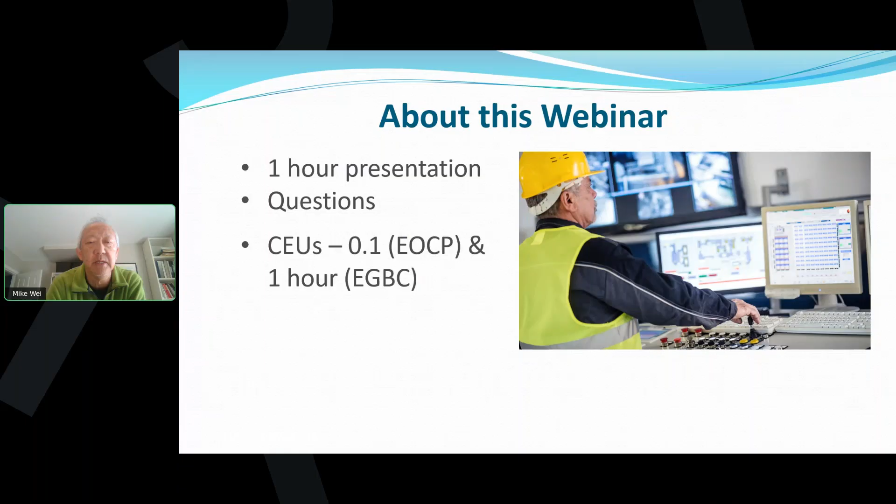Before I begin the presentation, I would like to take an informal poll. I'm going to put the questions up here quickly, and then Natasha Scott will manage the poll of the people attending, and we'll see what the results are. So the questions are: does your water supply system rely on a well? What percentage of your time as a water operator is spent dealing with your well?

Do you monitor the water level in your well, the quantities pumped, the specific capacity of your well? Do you look at the monitoring results to understand your well's performance over time? And so with that, I'm going to hand it over briefly to Natasha to run the poll questions with you. Natasha?

And I guess I'm going to keep going on the presentation. It's actually encouraging to hear that a large percentage of you do monitor and do look at the data, but there's also a percentage who do not collect data or do not look at the data once they're collected.

In this presentation, I'm going to make the assumption that not everybody is knowledgeable about wells and groundwater. And I hope for those of you that are very experienced, you'll still get something out of this presentation. But let's go on and start.

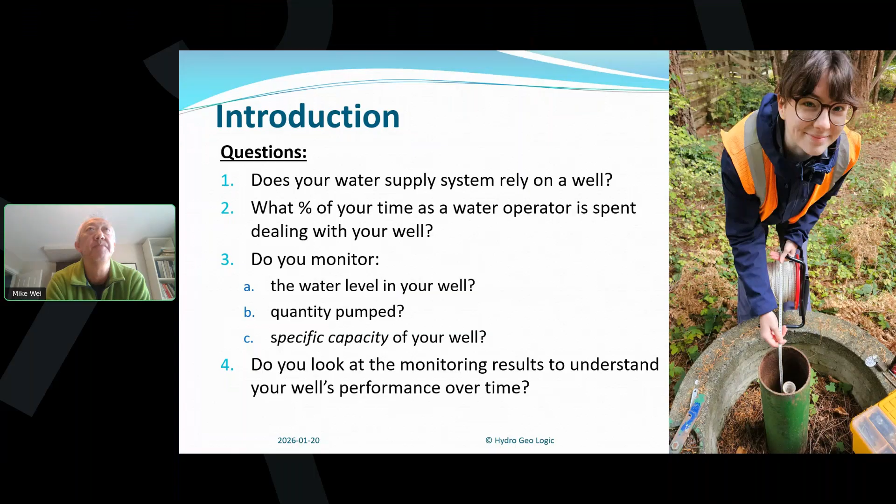So the agenda: the presentation is of 4 parts with questions later. The first is knowing your well from the well record. Second is understanding well performance and yield. The third is understanding the factors that govern well yield and well performance. And the fourth, what to measure to track well performance.

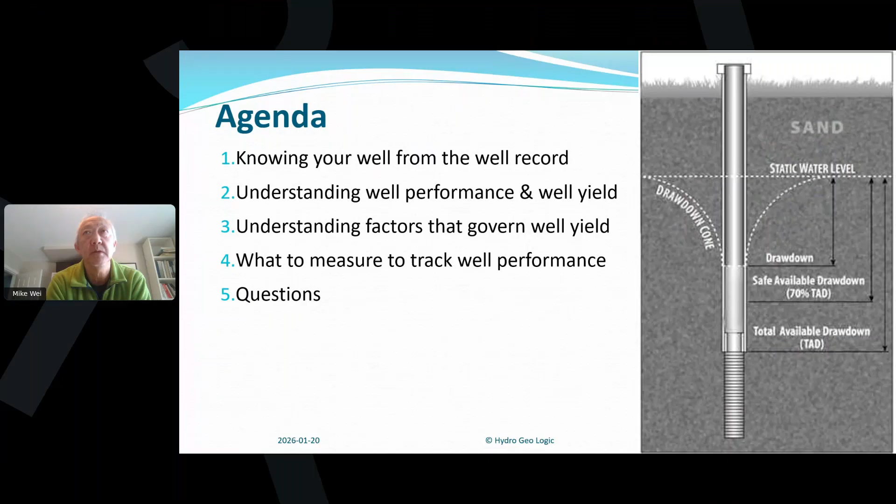So for the first item, we're going to look at some learning objectives. We're going to look at some basic components of a well. We're going to learn, or at least understand, how to search for a record of a specific well in the province's GWells database.

We'll look at the importance of interpreting the well's construction and lithology from the record. And personally, diagramming the well, I find, is very helpful. And finally, identifying the source aquifer from the well record.

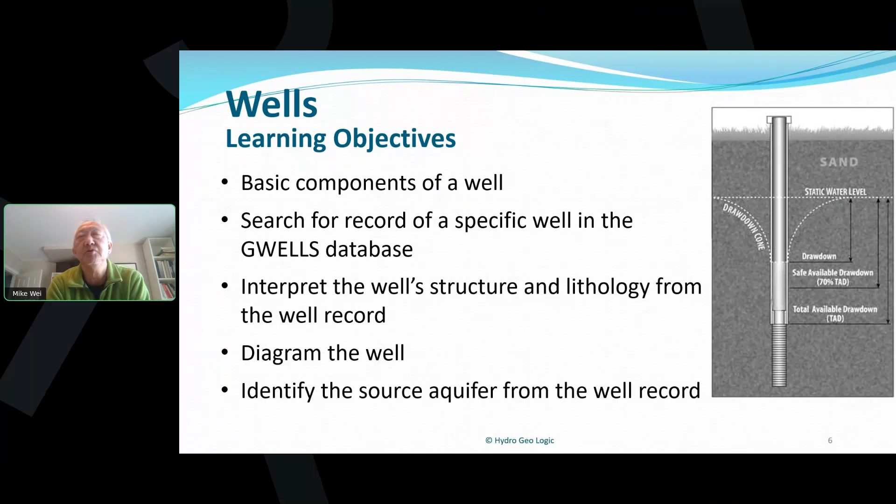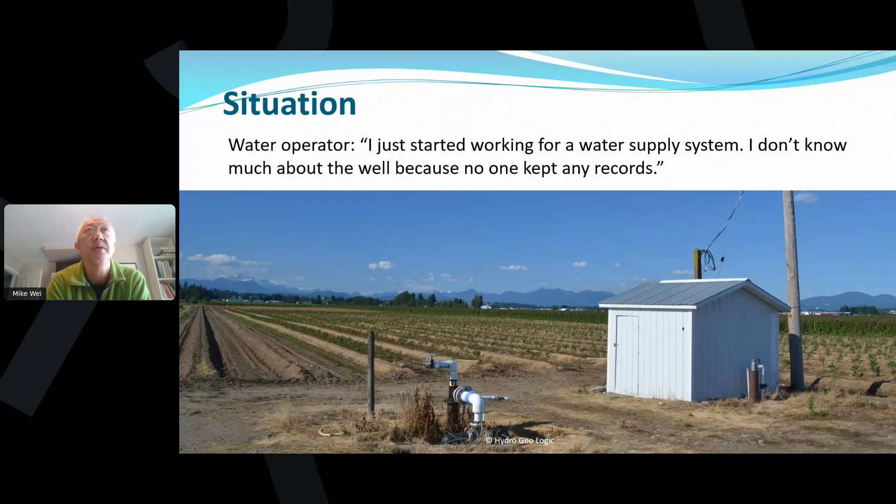So this may be a situation that some of you may have encountered: I just started working for a water supply system. I don't know much about the well because no one kept any records. So let's start off with just the basics of what a well is and some of the works and components of a well and what their purposes are.

So let's start off with the basic well components for a well drilled into an unconsolidated or sand and gravel aquifer. And let's start at the bottom here. I hope you can see my mouse with the well screen. The well screen is really a stainless steel intake that has slot openings that allow water to enter the well, but not sediments.

Above the well screen is the production casing. Production casing for water supply wells are typically made of steel, and they vary anywhere from 6-inch diameter to larger, depending on the volume of water that needs to be pumped out.

The production casing keeps the hole open and conveys water from the well screen up to the top of the land surface. At the upper portion of the production casing, between the ground and the casing, the driller has installed usually a surface seal. A surface seal comprises bentonite clay, usually around 1 or 2 inches thick, all the way around the production casing in the upper portion of the well here.

Typically, the length of the surface seal is 15 to over 20 feet long, and the purpose of the surface seal is to prevent any contaminated runoff from seeping down the outside of the production casing, dribbling down into the bottom of the well, and making it into the inside of your well as part of your water supply.

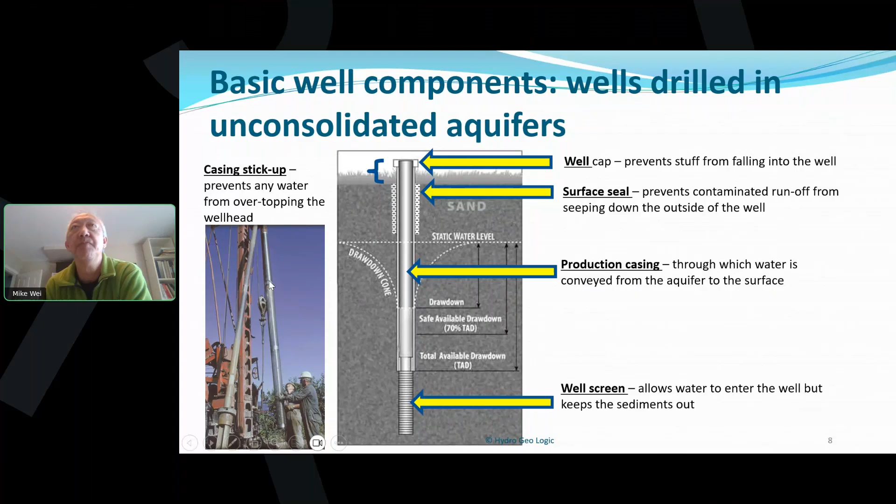The picture on the lower left here shows a well driller and his assistant or helper lowering down 2 sections of well screens and a riser pipe above it into an irrigation well that they are constructing.

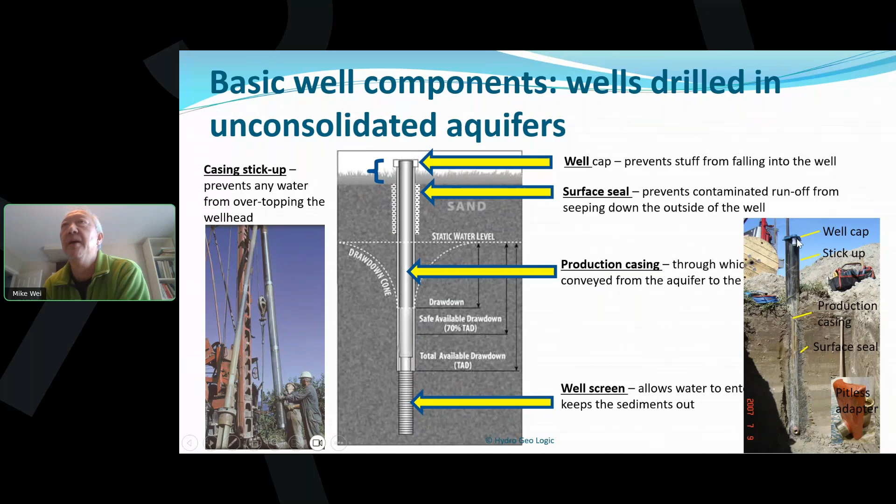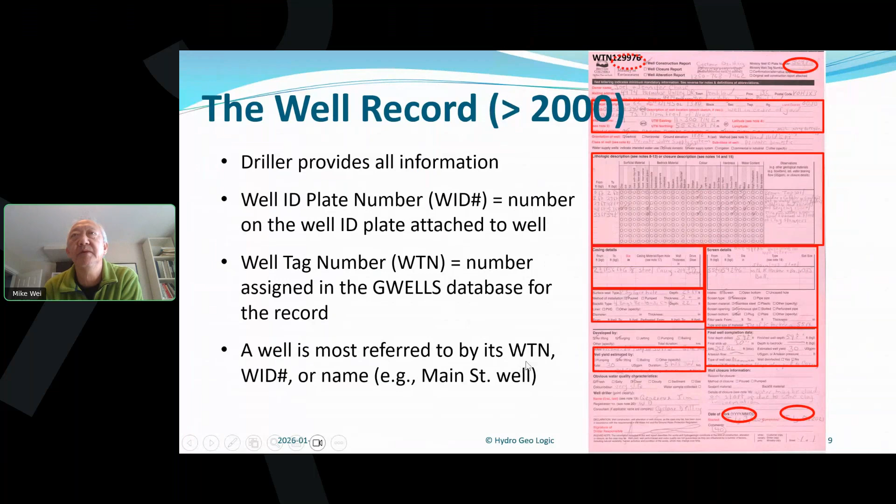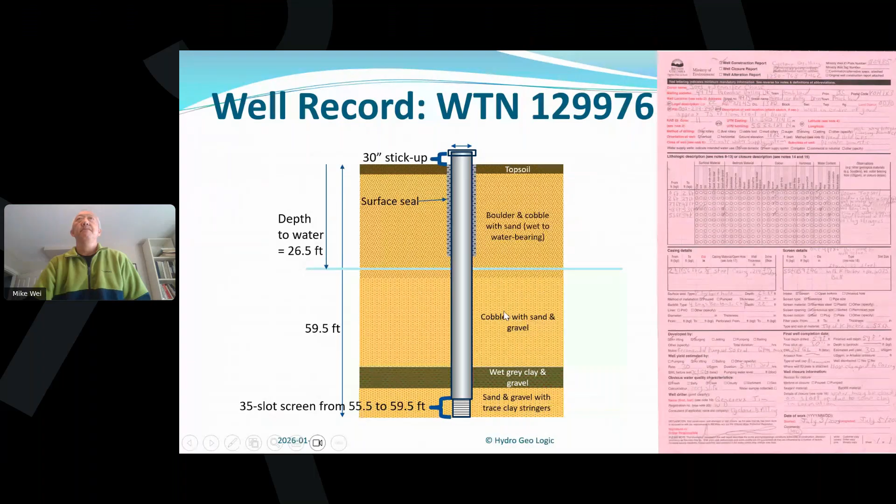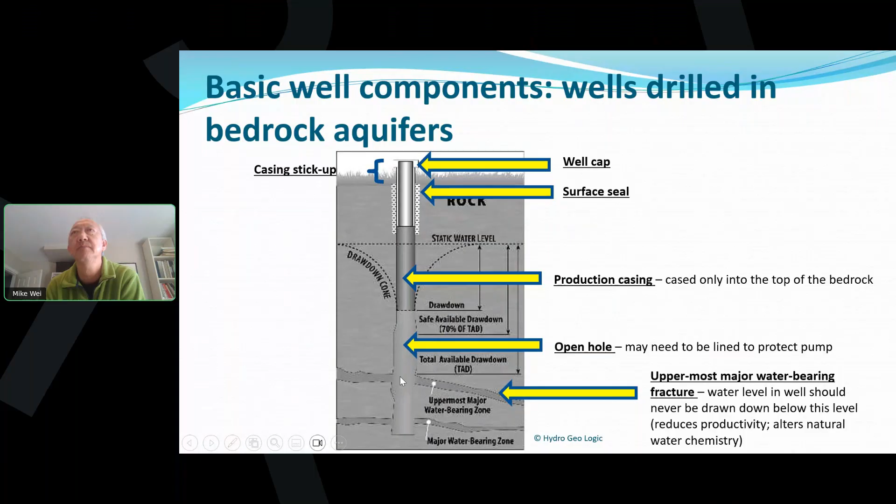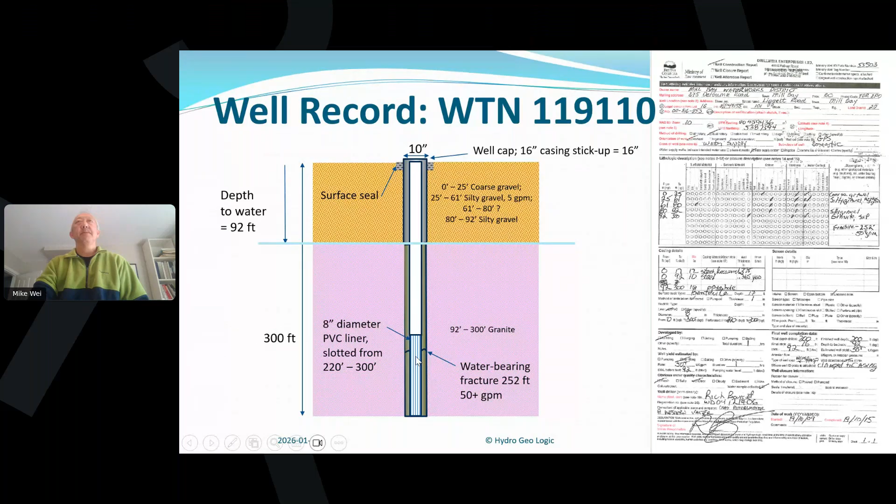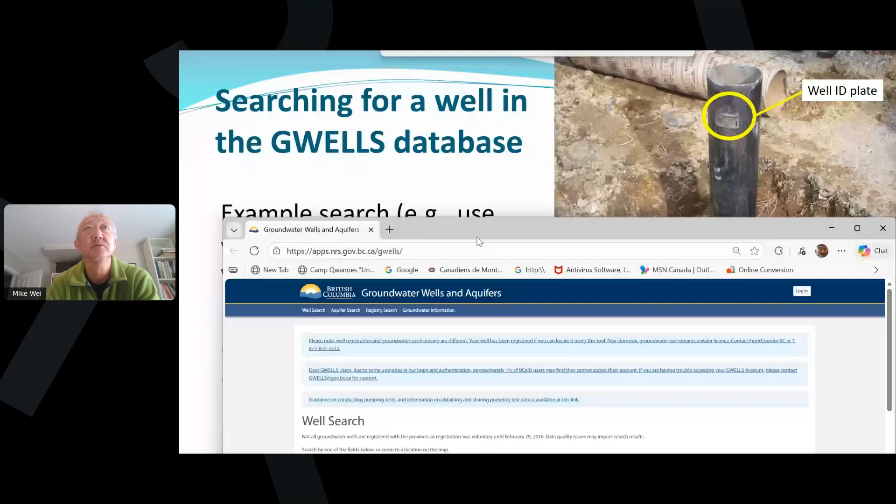Let's go by well search, and let's search for the well with the well ID plate number 53503. So if we search for that, I hope you can see when I hit the link, I come to this site. I guess I've already forgotten the number - it is 53503. So if I enter 53503 in the search criteria, I'm either searching well tag number or ID plate number, and I hit it.

The search returns a couple of wells, one in Quesnel and one in Mill Bay. It's the well in Mill Bay that I'm really interested in, because 53503 is the well ID plate number, the plate that I see on the ground. When you click on this, you get to the well record with all of its lithological and construction information. At the very bottom is a link to the paper record that the driller submitted.

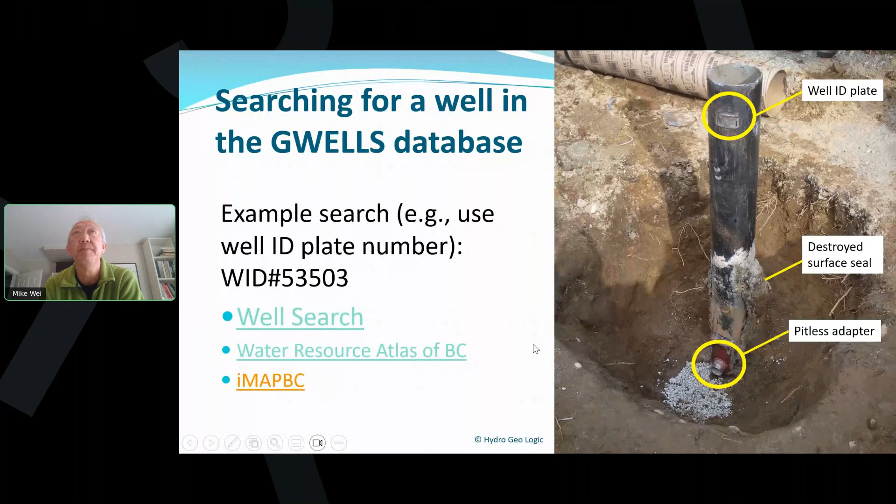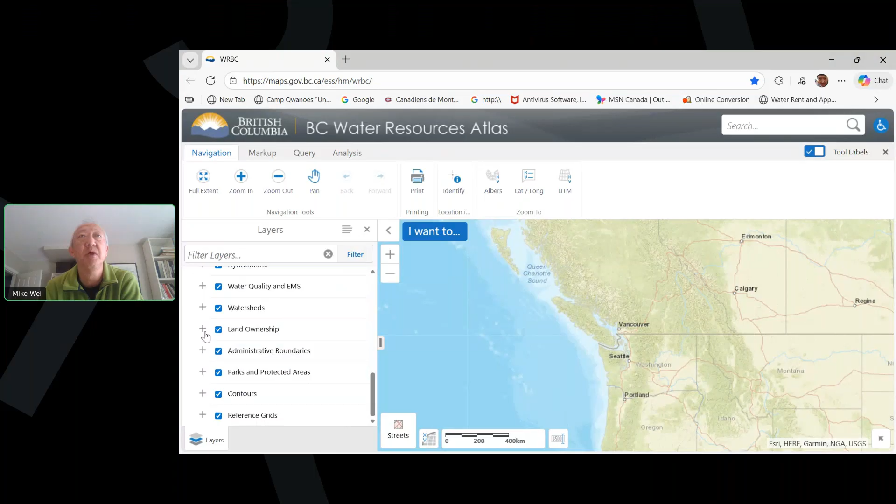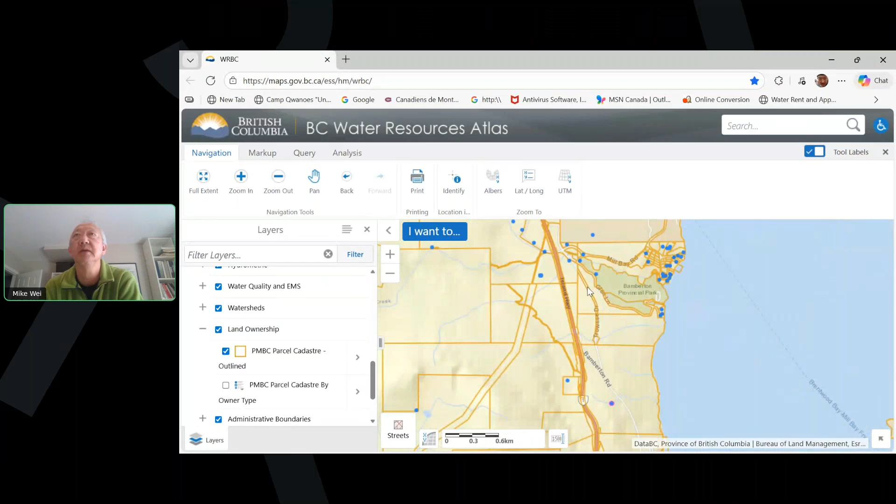If I go to water wells and bring up the groundwater well layer, then go down to land ownership and bring up the parcel properties, I can search for my well here in Mill Bay. I have to know exactly where that well is to find it, but I know it's on Liggett Road, near the highway, and it's these two wells.

I can also turn on the imagery using this button, and I can see the water tower and the two wells right here. Using the identify button, I click and drag it over these two wells, and it's the well just slightly to the north with the well tag number 119110. I click on that and click the link to the well record.

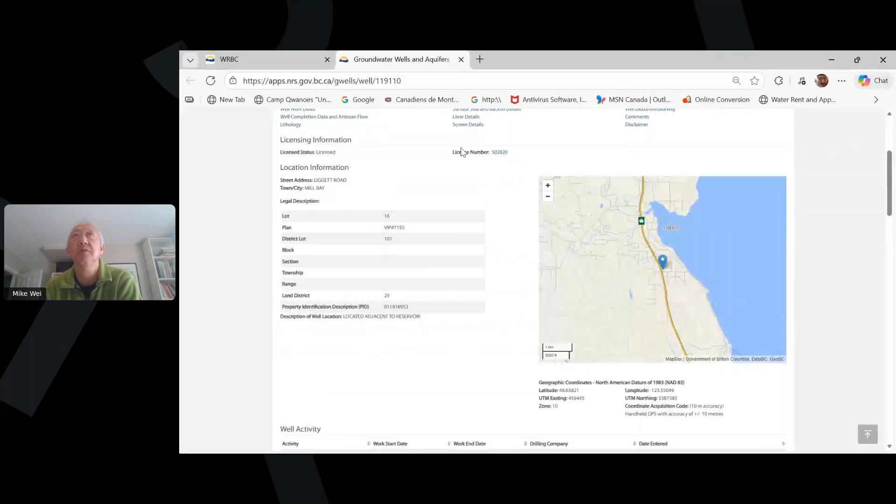It takes me back to the same page as before. So I'm going to close these and go back to the presentation.

I do recommend diagramming your well. If you need help, find somebody who can help you do that. It's based on the information in the well record. There are some wells where, if no records are available, you might have to diagram it based on all that you know, which might be the diameter, the stick up, and so on. But at least the diagram will show you what you know and what you don't know.

I would put the diagram in a vertical scale to map in the lithology and the depths properly to scale. I would diagram the casing, the screen, the cap, the surface seal, the lithologies, the water bearing zones, and the groundwater level. A diagram really allows the construction of the well, the geology, and the source aquifer to be visualized, not just by the operator, but by everybody else who's not so familiar with that well and location.

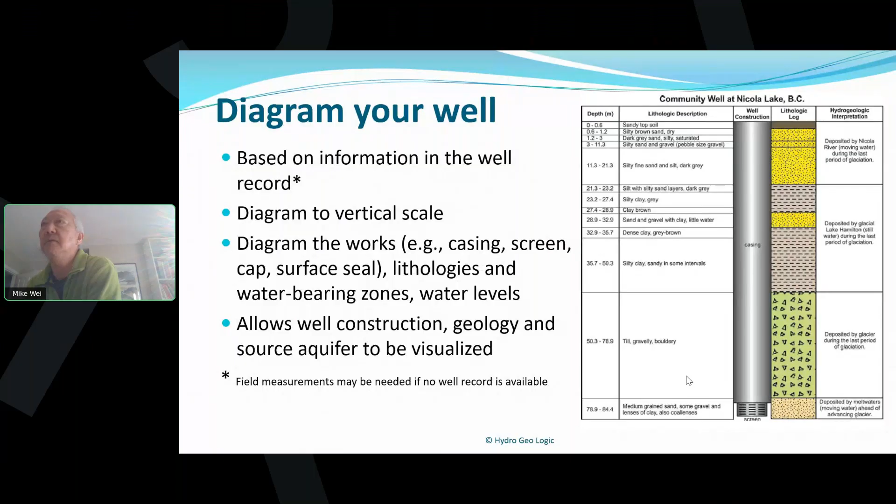So a couple of definitions before we leave this first item about your well. An important definition is drawdown. Drawdown in your well is the static, or non-pumping, water level minus the pumping water level — the difference between the two, and how much it is drawn down. The total available drawdown is the water column in your well between the non-pumping or static water level and the top of the screen or the top of the water-bearing fracture.

It indicates the amount you could draw the water level in the well down to produce the water you need for your supply. Safe available drawdown is 70% of the available drawdown, with the bottom 30% reserved for harsher, drier conditions and for housing the pump. So usually when we rate the capacity of a well, or pump a well, we only allow it to draw down to 70% of what is totally available with respect to its available drawdown.

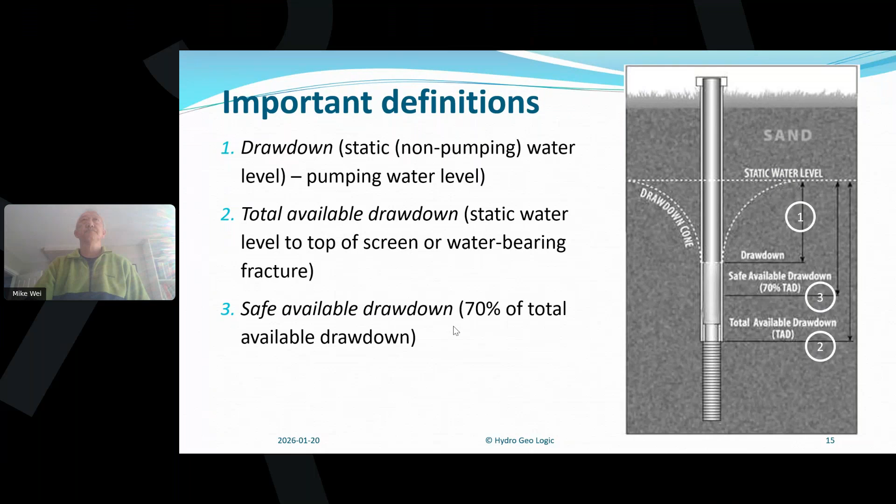So how do you figure out available drawdown from a well record? You can look at the top of the screen in the well log we've looked at and the groundwater level, and find the difference between the two. Or you can go to your diagram and look at it. The static water level is at 26.5 feet, the top of the screen is at 55.5, so the total available drawdown is 29 feet.

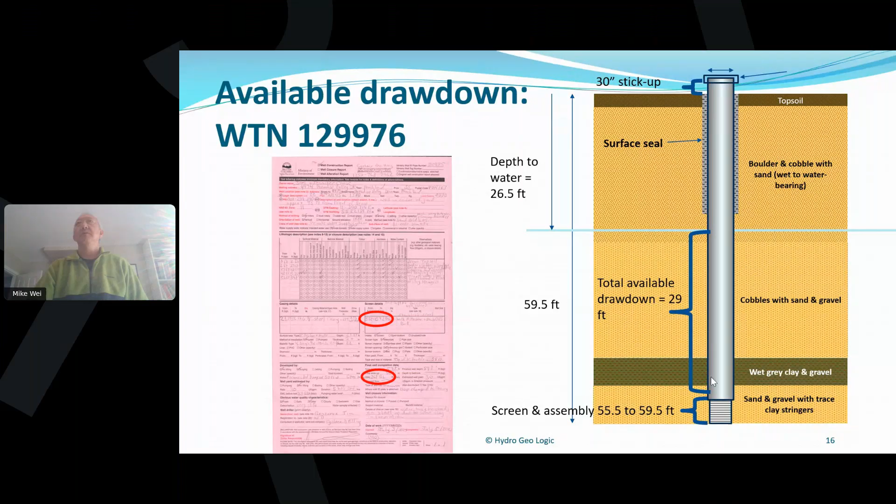With the bedrock, same thing. You can get that directly from the well record, or you could deduce that from your drawing. So from a static water level of 92 feet and the uppermost water-bearing fracture at 252 feet, the available drawdown in this well is 160 feet.

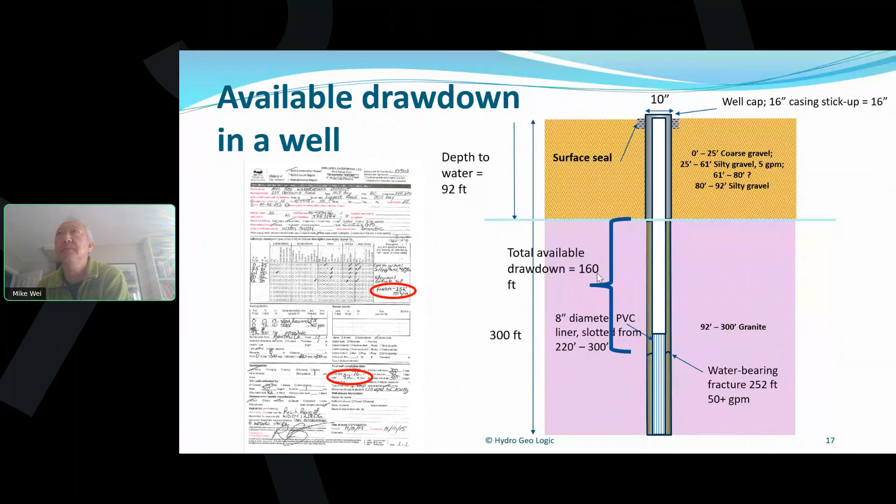Concluding for the first item, there are two main types of aquifers, unconsolidated and bedrock. The construction of the wells is slightly different when constructing a well into an unconsolidated versus a bedrock aquifer. Many wells are registered in the GWells database. Records of unregistered wells may be obtained from the well owner or the local driller. This can be challenging because you will need their cooperation. Diagramming a well is useful to visualize its construction methodology and to determine available and safe available drawdown.

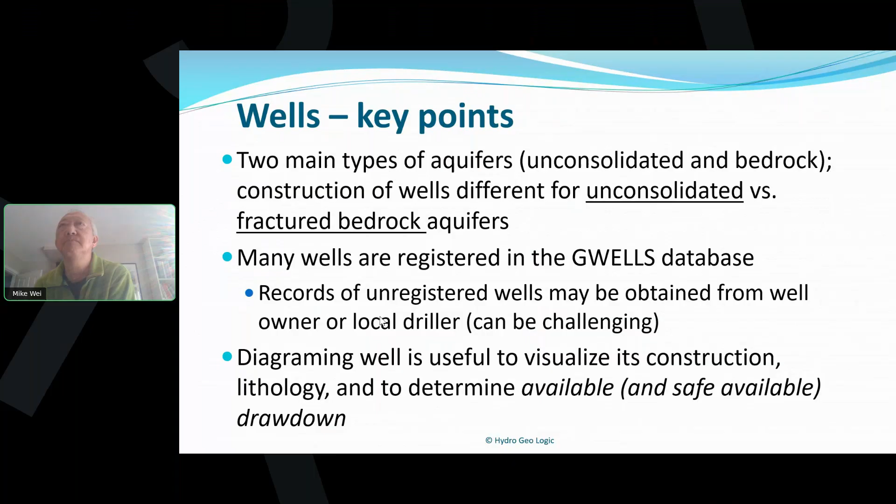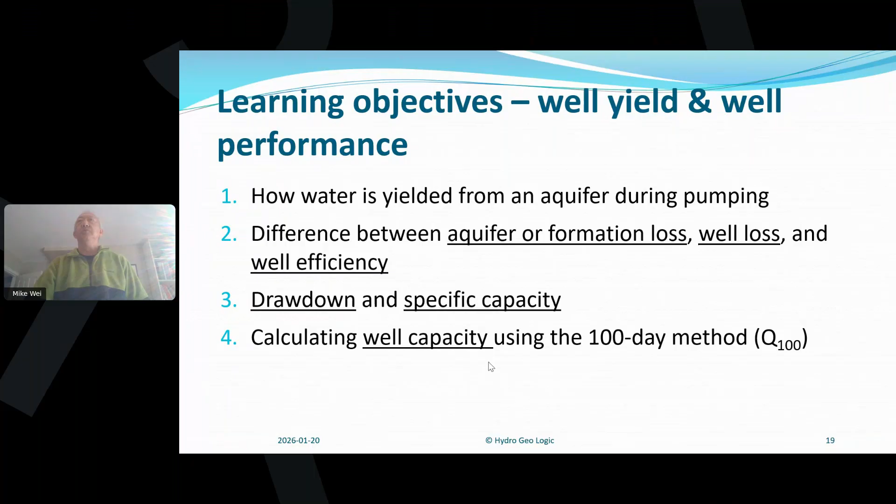Let's move on to the second item, which is learning about well yield and well performance. How is water yielded from an aquifer when the well is pumped is something we'll look at. The difference between aquifer or formation loss versus well loss and how they affect the efficiency of the well to pump water out. We're going to look at drawdown, which we've already touched on, and the specific capacity, which is an indication of well performance, the ability for the well to be pumped. And then finally, we're going to look at how well capacity is calculated using the 100-day method developed here in BC.

As a new water operator who's just getting an understanding of your well, you may wonder what the well yield of your well might be. There are different ways to find out. One way is from the driller's record, the estimate of well yield from the well record. Another may be the capacity of the pump that's in the well. Both of those are pretty simple to get once you can find the well record and information on the pump.

Really what I want to get to here is the third method, which is test pumping your well. This is usually done when the well is first drilled before it's put into production. It's usually done by a contractor like a pump installer under the supervision of a groundwater consultant. When you test pump a well, you are doing it under controlled conditions, measuring pumping water levels, static water levels, and calculating drawdowns and specific capacity. I want to get into that third method a little bit here. Many operators may not be involved in a full-on pumping test, but in measuring specific capacity, you will have to do many of these tasks, maybe over a much shorter time period anyway. So it's good to know.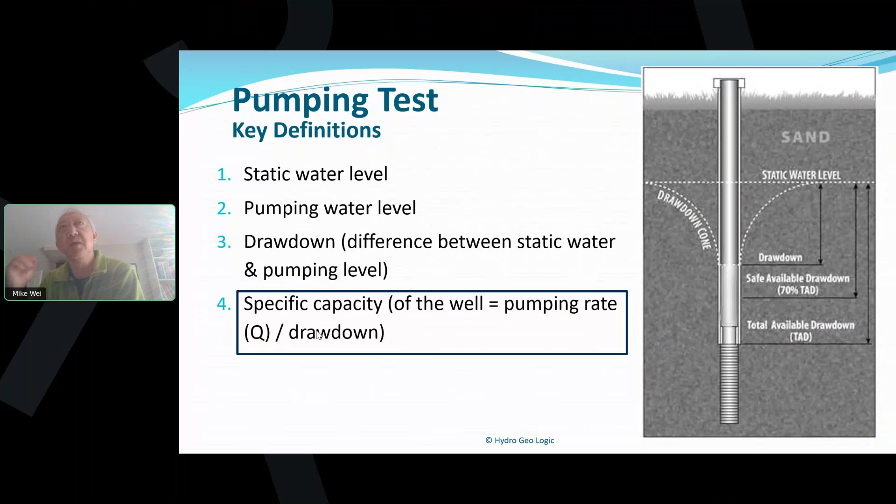Let's look at what happens when a well is pumped. When you pump a well, you're lowering the water level in and immediately around the well. This causes a gradient to develop around your well. This hydraulic gradient, this pumping and lowering of the water level, increases this hydraulic gradient, and this gradient drives groundwater towards the well that's being pumped. The gradient is steepest at the well and decreases away from the well, because the cross-sectional area through which water is flowing to the well is ever increasing as you go farther and farther from the well itself.

So in effect, pumping creates a vortex, a lowering of the water level in the aquifer, and it looks like a cone of depression or a cone of drawdown around the pumping well. This is a cone of depression of the water level and a cone of depression of the water energy that is around your well as your well starts to pump. This cone of depression grows at an exponentially decreasing rate beyond the pumping well as pumping continues. As long as the pumping water level in the pumping well is dropping, that indicates the cone is continuing to grow laterally beyond your well.

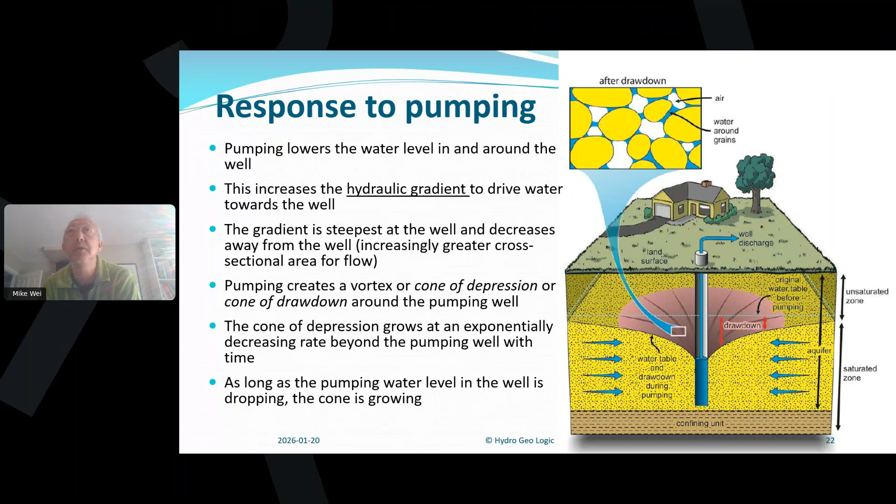So in a pumping test, this is kind of what the water level looks like as you go through a pumping test. Prior to the test, the water level is at the static, non-pumping level. You want to take measurements of the non-pumping water level. And then when you turn the pump on, right here in the beginning, this is a graph showing depth to water below the well and the elapsed time since pumping started.

When you first start the pump test, the water level in your well drops very quickly, and the drop will continue, but the rate of drop will decrease over time during this pumping phase. The difference between the original water level before pumping and the pumping water level anytime during the pumping phase is the drawdown in the well.

Now, when you turn the pump off, typically a well is pumped at a constant rate for 24 or 72 hours. If after that time you turn the pump off, the water level in the well will recover very quickly and then continue to recover, but at an ever decreasing rate during the recovery phase. Water levels are monitored in the pumping well, and if you have an observation well nearby, you monitor that as well in a pumping test. Monitoring continues after pumping stops into the recovery phase.

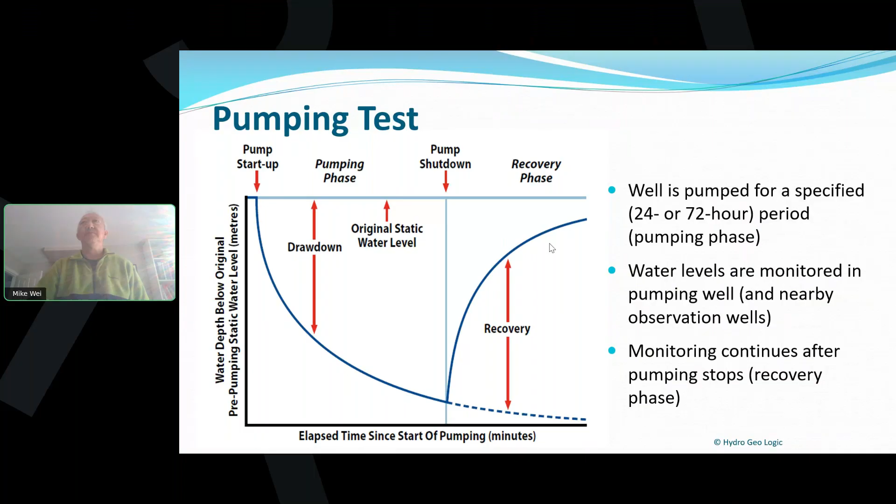Stepping aside for a minute, I'm going to introduce what I mean by aquifer loss and well losses. When you pump a well, water has to move from the aquifer towards and into the well. As it moves towards the well, that groundwater is losing energy and the water level is gradually dropping more and more towards the well. This loss in head of the groundwater as it flows to the well is called a formation or aquifer loss — it's just the natural loss of energy as water comes towards your well.

But at the well itself, the groundwater will lose additional frictional head loss moving from outside in the aquifer into the well screen. This additional frictional head loss may be caused by damage in the aquifer formation around the well from drilling that has never healed. It could be from inefficient screen design, like openings too fine or clogged, or insufficient well development or over pumping — the well wasn't sufficiently developed for the screen to do its work.

Now, if there was no well loss, the water level in the well would be where this blue line is. As the aquifer losses reach the well, just inside the well, this would be the pumping water level. But with well losses, you have additional drawdown because water loses energy coming into the well, designated by this red line. The implication of well loss is that it takes away available drawdown that could have been used to pump more water out of the well, so well loss is an indication of the inefficiency of the well. A 100% efficient well would have zero well losses, and anything less than 100% will have some frictional head losses as the water enters the screen.

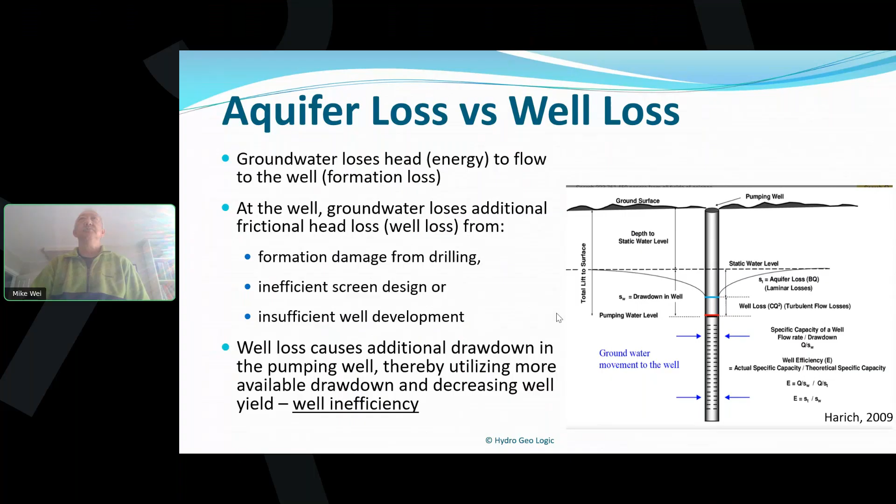Back on track to specific capacity — it is the pumping rate divided by the drawdown. Specific capacity reflects the productivity of the aquifer. It also reflects the efficiency of the well itself. It's a really good indicator.

Specific capacity is a function of time since pumping started, unless the cone of drawdown and the pumping drawdown stabilizes. So when comparing specific capacity year to year, when monitoring your well's performance, it's important to reference it with respect to time — like, when you measure the specific capacity, is it after 1 hour of pumping or 24 hours of pumping? The time reference is important when referencing and comparing specific capacity from different tests.

A decrease year to year in specific capacity indicates that your well's performance is declining, and your efficiency is becoming more and more inefficient.

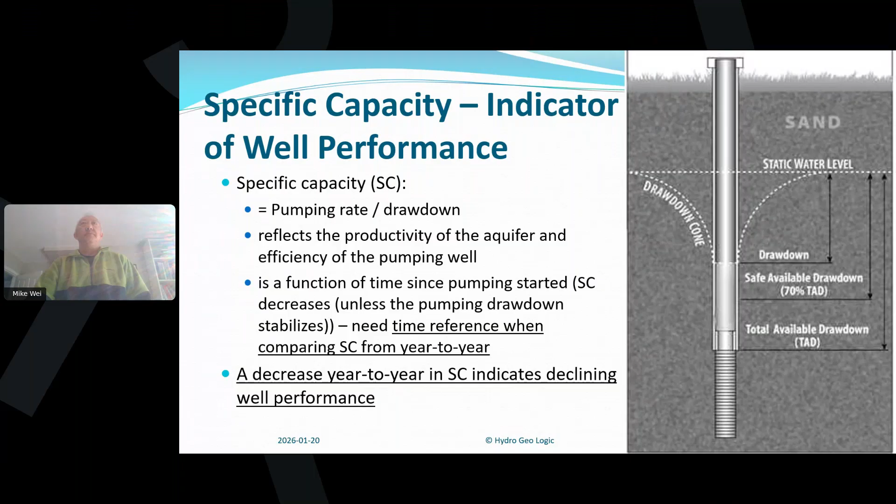So how does that affect well yield? Well yield is a product of the specific capacity and the available drawdown in your well. In fact, well yield in BC is calculated by using the safe available drawdown — 70% of the available drawdown in your well — times the specific capacity, usually determined for 100 days of continuous pumping.

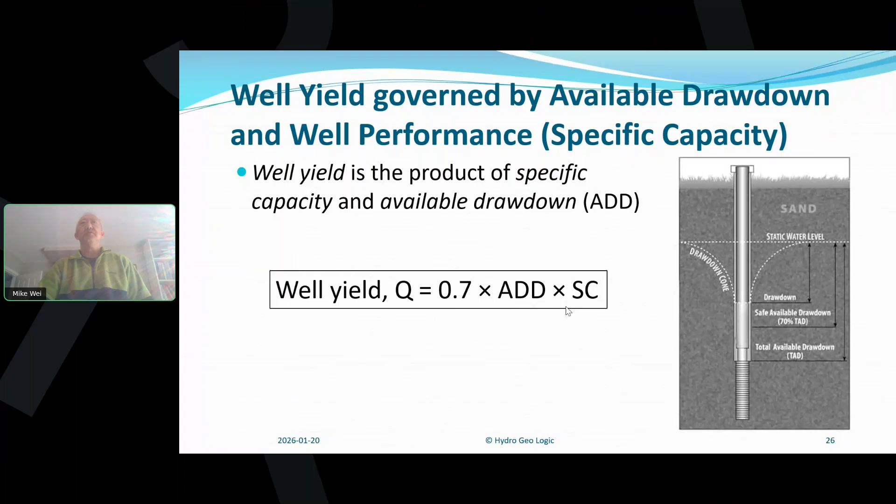So in a pumping test, you measure the drawdown with time. This is a graph showing drawdown, zero at the top on the vertical axis, increasing downward, like the pumping water level dropping. Plotted against pumping time for this 25-hour pump test, up to 1,500 minutes, you can see the drawdown increases very fast in the beginning, and the rate of drawdown slows down.

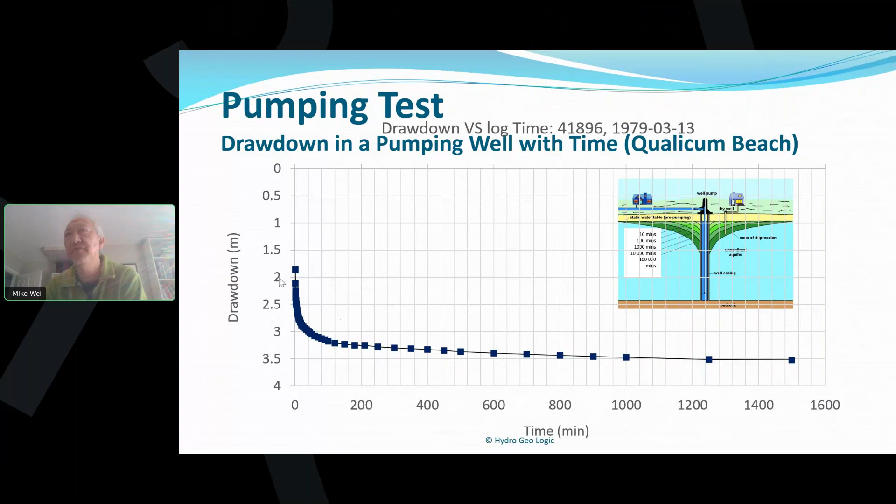But it continues to increase over one day. Now, instead of plotting drawdown with time, if we plot it against log of time, this curved line becomes more or less a straight line. And if we were to calculate the well yield, we would extrapolate that straight line to 100 days of pumping.

100 days of pumping is 144,000 minutes. So as this graph shows, specific capacity changes depending on the length of the pumping time. After 1 hour of pumping, the drawdown in the well is 3.1 meters. If it's pumped at a constant rate of 736 cubic meters per day, the specific capacity after 1 hour is 237 cubic meters per day per meter of drawdown, or meters squared per day.

If you extrapolate the pumping to 100 days, the drawdown is expected to be 4.2 meters, and the specific capacity after 100 days of pumping is expected to be 175 meters squared per day. So when you talk about specific capacity, referencing the time of the test is important.

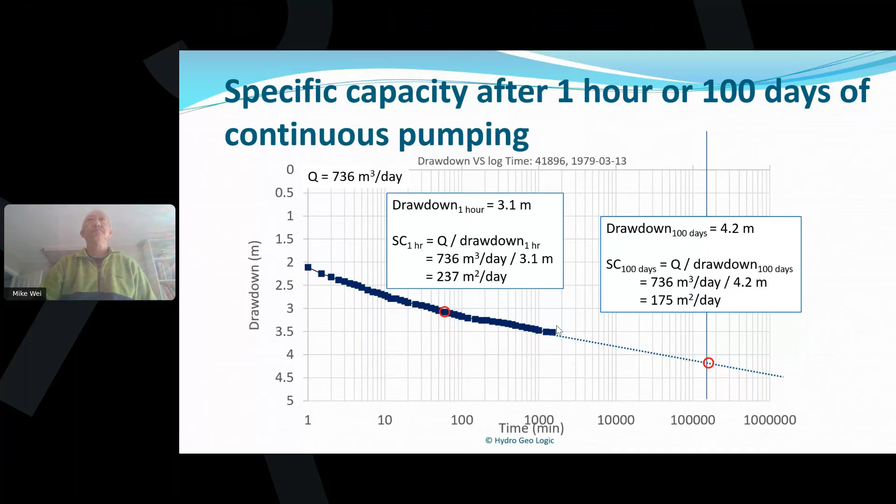So how do you calculate well yield using the 100-day method? You do a pumping test, determine the available drawdown in your well from your well record, and plot drawdown versus logarithm of time. You extrapolate that drawdown behavior to 100 days, calculate the specific capacity at 100 days, and then calculate the well capacity by taking 70% of the available drawdown and multiplying it by the specific capacity at 100 days.

This is how consultants and government rate the long-term yield of a well. It assumes the well will be pumping 24/7 for 100 days straight. You may or may not do that when operating your well, but this is how it's rated by hydrogeologists.

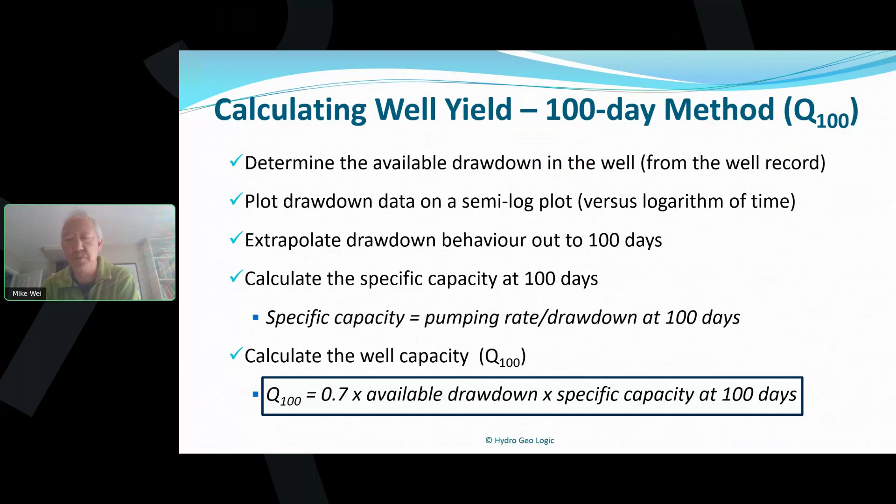So here I have an illustrative example of the 100-day method. This is a well that I oversaw the drilling of. It's roughly 282 feet deep, screened in the entire aquifer, found at 258 to 282 feet. The static water level back in 1987 was 47.7 feet, so the total available drawdown in this well is 209 feet, or 63.8 meters.

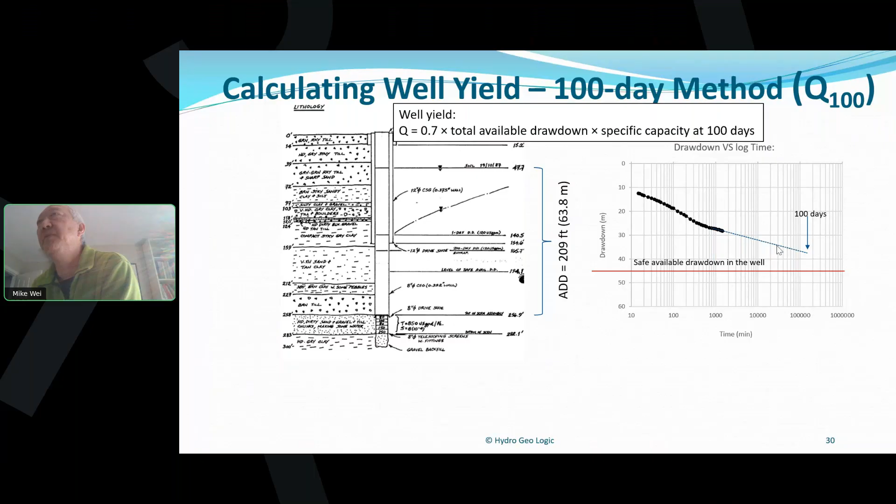We went after the well was drilled to pump test it, a 24-hour test, and this is a plot of the drawdown in the well versus logarithm of time. When you extrapolate the pumping behavior all the way to 100 days, it's just a little bit above the safe available drawdown in the well.

So the pumping rate is 624 cubic meters per day. The projected drawdown at 100 days is 37 meters. The specific capacity after 100 days is 624 divided by 37 meters, or 16.9 cubic meters per day per meter. The well yield is 70% of the total available drawdown times the specific capacity at 100 days, or 754 cubic meters per day.

Now, I couldn't really rate the well at that rate because I never pumped it at that rate. So the practical well yield will be 624 until we can pump the well at a high enough rate to verify this long-term yield. But in essence, this is how a consultant would calculate the long-term yield of a well.

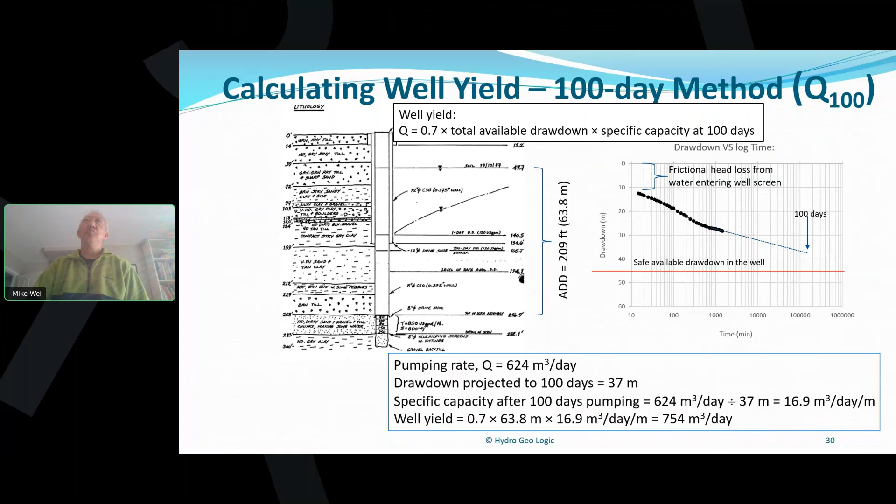You see in the first few minutes, there's actually over 10 meters of drawdown, quite a bit. I'll bet a lot of that is probably well losses because the well wasn't 100% efficient. So how do we quantify or estimate well inefficiency? Well, the well efficiency is the ratio between the drawdown if there were no well losses, divided by the drawdown when there are actual well losses.

So if you look at the pumping test data here for another well, within the first 30 seconds of pumping, the water level has already dropped over 1.5 meters. To me, this is probably quite a bit of it due to well losses. So if that's around 1.5 meters of well loss, then all of these other water levels when pumping the well should probably be about 1.5 meters less than what's actually measured.

So if I was to calculate or estimate efficiency of the well, the drawdown with no head losses divided by the actual drawdown, I'd take the drawdown at 10 minutes, 7.95. If I think there's about 1.5 meters of well losses, I divide the drawdown unaffected by well loss by the actual drawdown, which is affected by well loss, and I get something like about 80% efficiency. So while there are well losses in every well, a properly designed and developed well should be at least 80, 90 or more percent efficient.

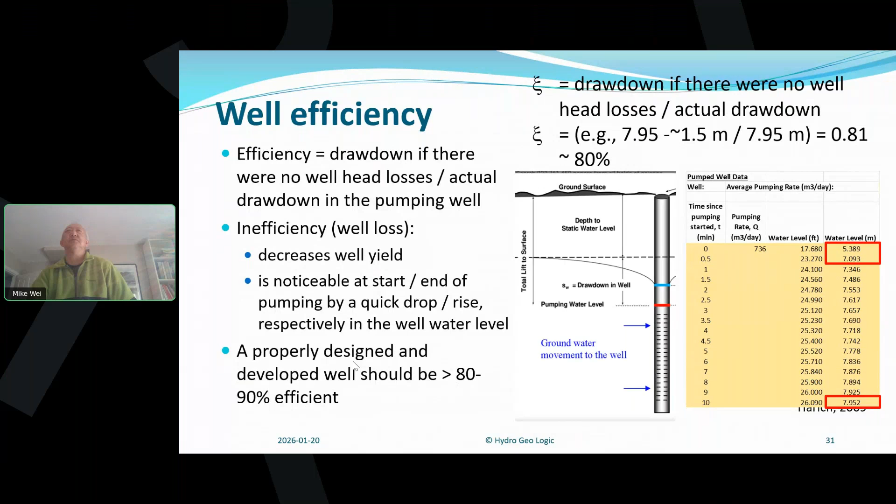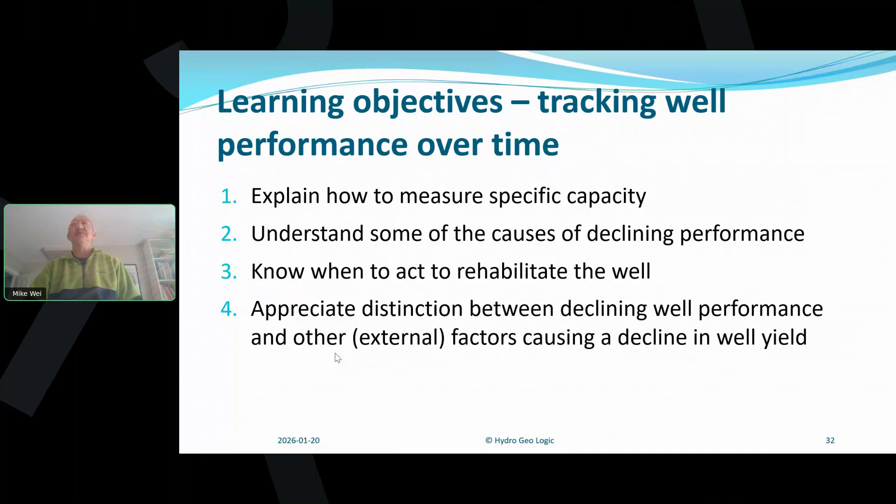Okay, let's go on to the third item. Explain how to measure specific capacity, understand some of the causes of declining well performance or well inefficiency, know when to act to rehabilitate a well, and appreciate the distinction between declining performance or other external factors that might cause a decline in your well yield.

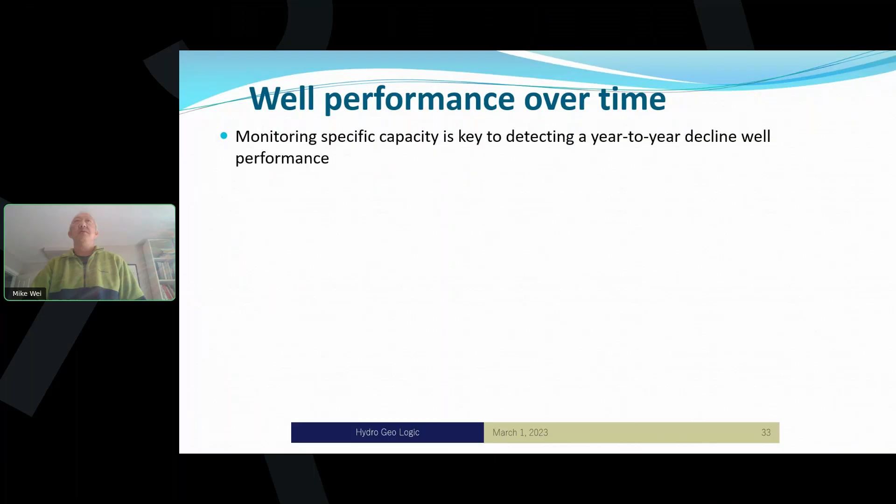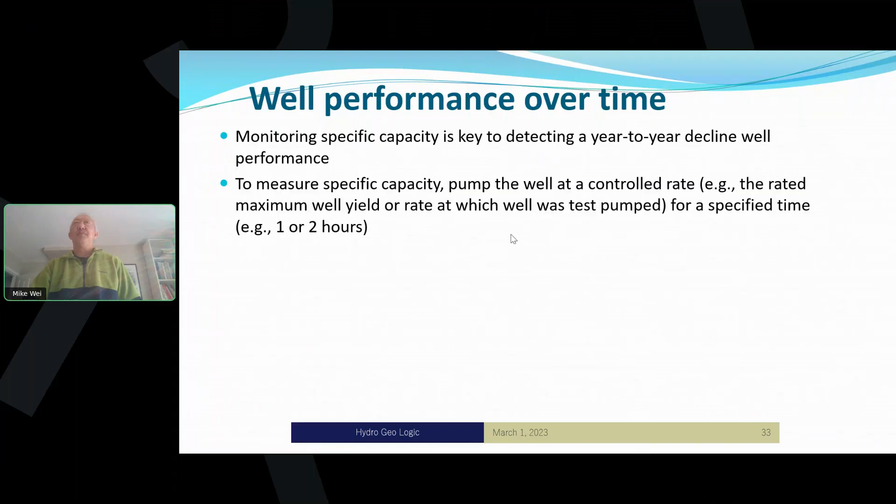So to measure performance over time, one thing I recommend is monitor the specific capacity from year to year. To measure the specific capacity, pump the well at a controlled rate, usually the maximum well rate that the well is rated, or the rate at which the well was pump tested, because you have data, for a specified time. Doesn't have to be long, half an hour, 1 hour, 2 hours.

Measure the static water level prior to the pump test. Measure the pumping water level after the specified time. Calculate the drawdown, then calculate the specific capacity after that specified time, which is the controlled pumping rate divided by the drawdown after the 1 or 2 hour period that you're specifying.

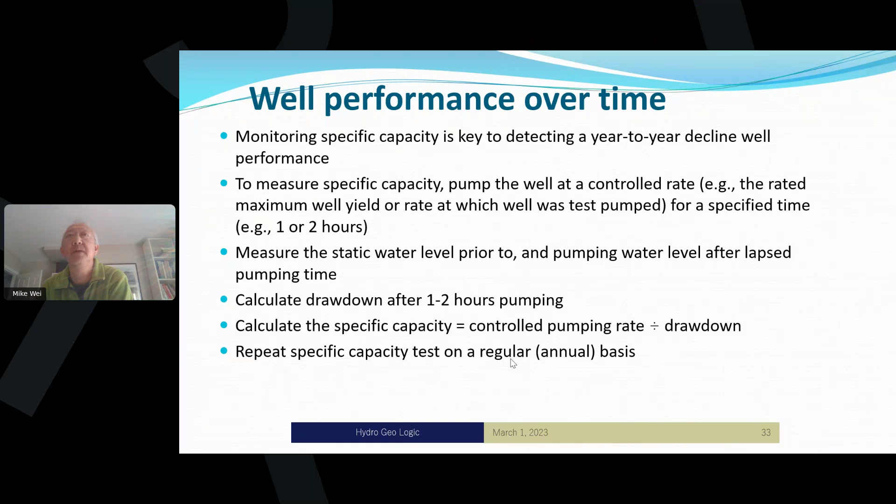Repeat this procedure on a regular annual basis, same time of year, same kind of controls, so that your numbers can be comparable year to year. Plot the specific capacity over the years and compare it with the original specific capacity. Is it decreasing? Is it increasing? Is it staying the same? So it's important to always keep the original pump test reports from the consultant, because the original specific capacity can be found there.

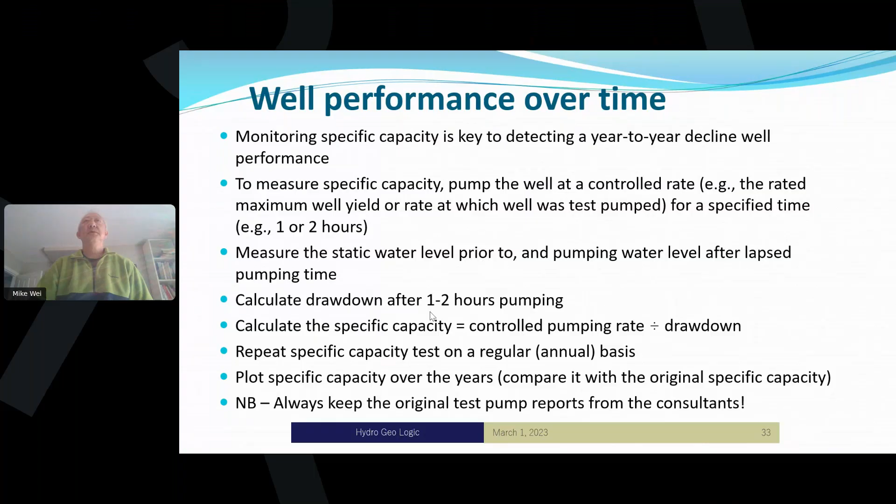So let's look at performance of the well over time. Initially, when the well is drilled, the well driller is also doing specific capacity tests as he is developing the well. The well in the beginning, when it's constructed, is not very clean. He needs to develop it.

And as he's doing that, he's pumping the well and measuring the pumping water level and the drawdown. As he's developing the well, the specific capacity and the well yield will continue to increase, and the drawdown and pumping water level will decrease to a point where he can't do much more. The well is as optimally developed as it can be. He hands the well over to the water supply system, and then you put it into operation.

If you monitor the specific capacity over time, you may in time see the specific capacity dropping. And if the specific capacity is dropping, it means your well yield is dropping. When it drops by more than 10 or 15%, you should get your water supply system to budget for hiring a consultant or a driller to rehabilitate the well.

When you bring in those professionals to do it, they can bring the well back up to its original capacity, and you continue on your merry way until it starts to decline again. Then you can bring in the driller or the consultant again to rehabilitate it. If you keep track of your performance over time, you will significantly lengthen the life of your well.

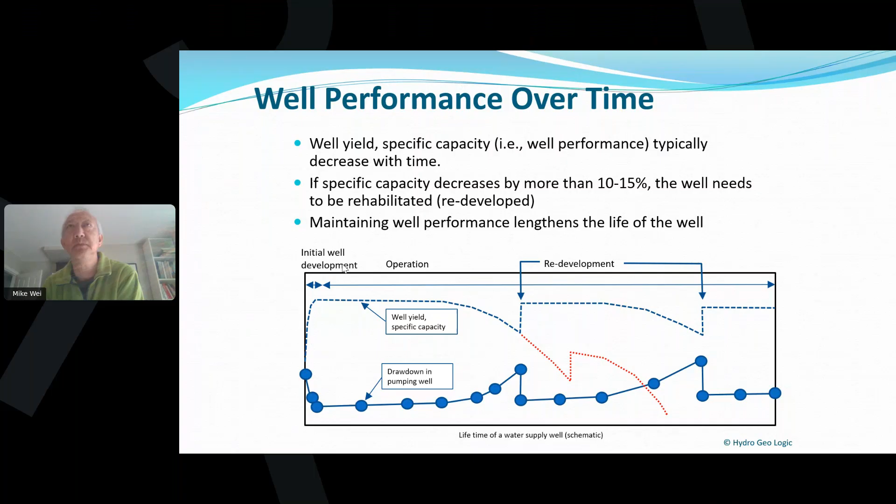What causes performance decline in wells? Well, it could be incrustation of the well screen. It could be carbonate incrustation, and I'm not going to go into it here, but you can click the link. If you have a water chemistry sample of your well, you can plug in your results and it will calculate how hard or how encrustive or corrosive your well water is.

There's manganese and iron in the water that can facilitate bacteria growth. There's biofouling of the well screen. There's plugging of the well screen because of inadequate design, inadequate development, or corrosion causing enlargement of these slot sizes, and causing sand and clay and silt to come into the well to clog the screen up.

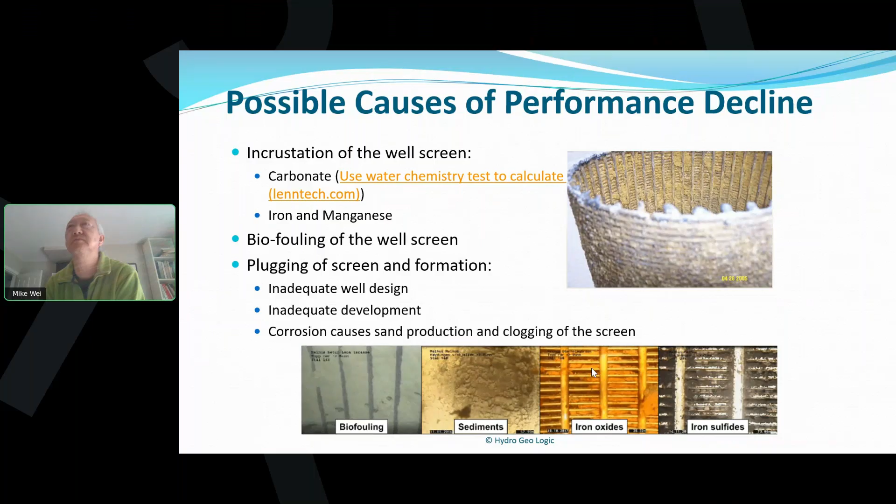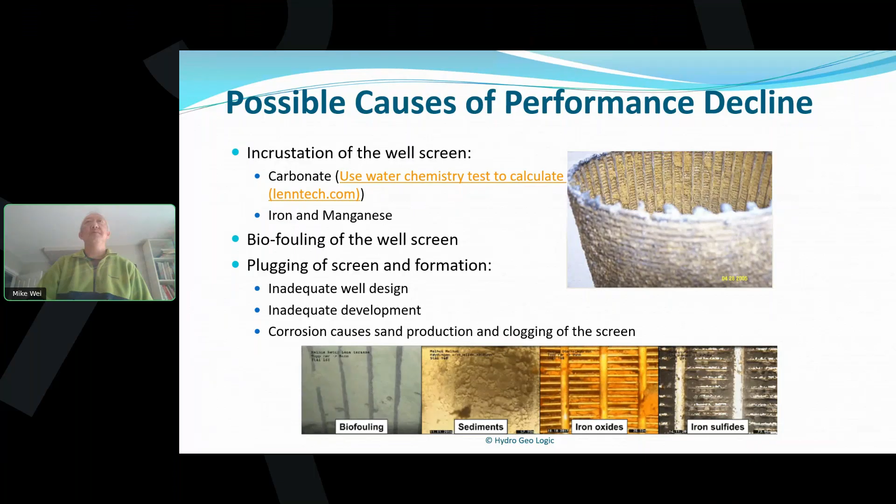So biofouling, sediments coming in, iron oxides and sulfides - all of these can be problems, but these problems will be diagnosable by the consultant and the well driller when you bring them in. So how would you deal with them? You could physically redevelop the well by scrubbing, brushing, surging, bailing, or jetting, or airlifting. You could put acid in the well to get rid of the incrustation.

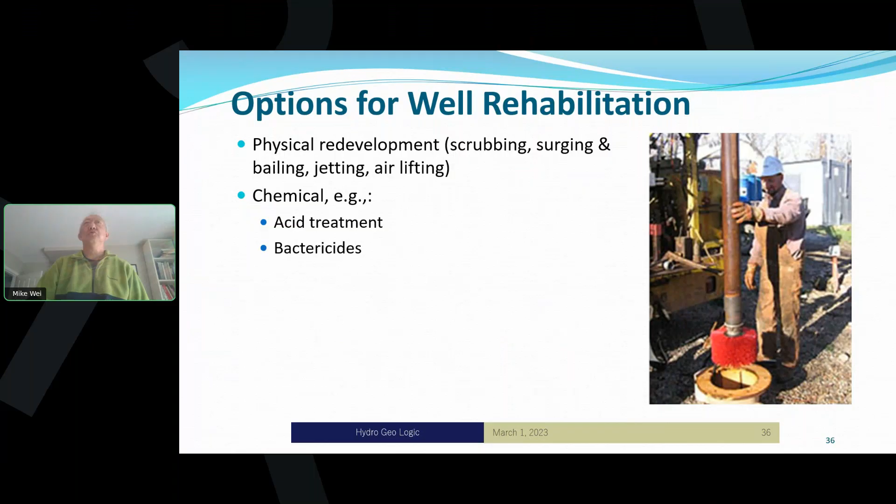You could put bactericide in the well to kill the bacteria. You could use heat to kill the bacteria, or a combination of the above. Or if it's a well screen design problem, you could reinstall a new screen, or you might have to drill a well next to it altogether.

The important thing is to consult a professional when the performance of your well is declining. And if you leave it too long, for example, the incrustation or bacteria could grow beyond the well screen into the aquifer itself, in which case it makes it much harder for the driller to put any kind of treatment beyond the well into the aquifer to clean up the problem.

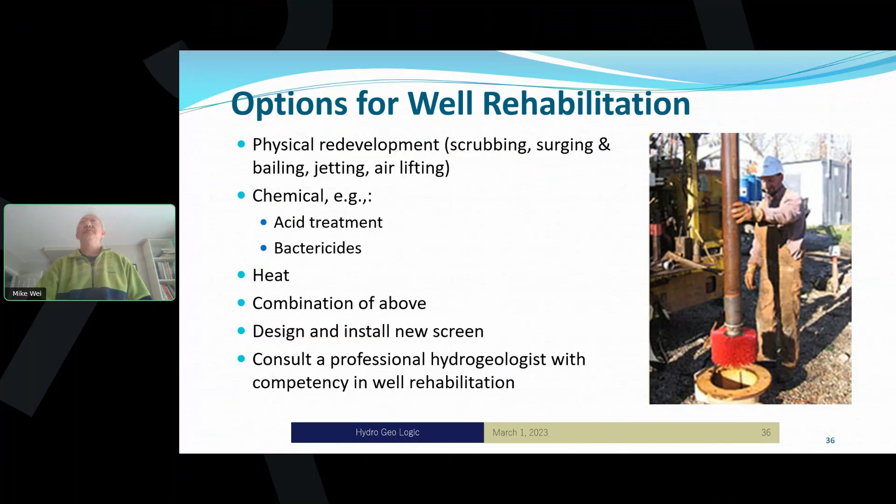So factors causing a decline in well yield - this is the last part of our presentation. A year-to-year decrease in specific capacity reflects a decrease in well performance, which causes a decrease in well yield. And this is something as an operator or well owner you can control and measure.

The other factor that causes your well yield to decrease is a drop in available drawdown. And again, as a water operator, you can measure the static water level in your well and see if it's gradually dropping over time. If it is, it means your available drawdown is dropping and your well yield is dropping.

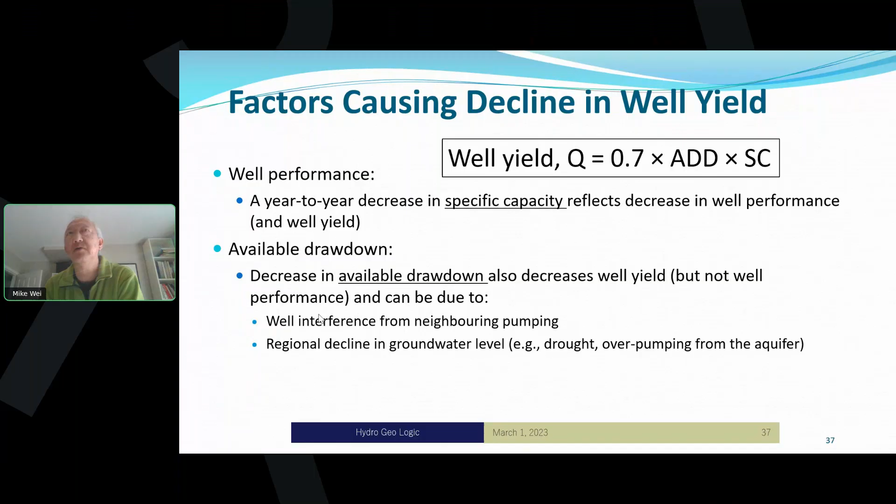But there are other external factors related to available drawdown. You could have interference from nearby pumping, or you could have a regional decline in groundwater level because of drought or because of over pumping.

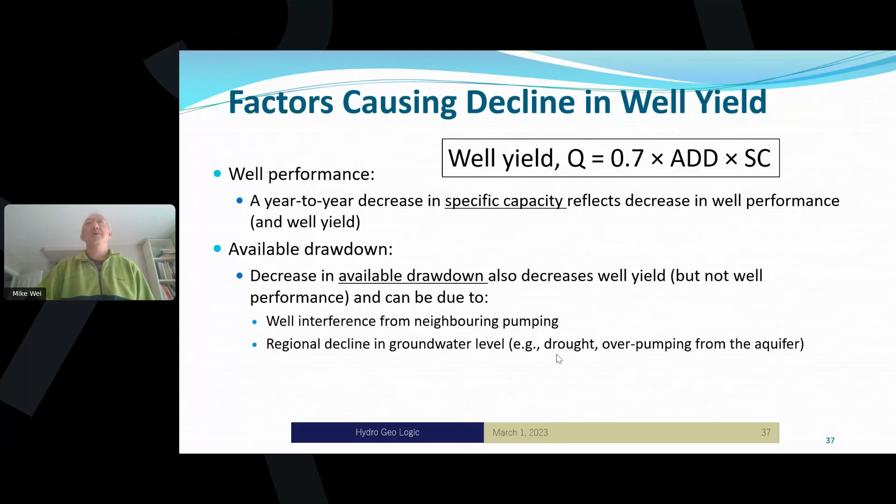With well interference, if you do have a water license and you do have priority over your neighbors in terms of water rights, you could contact the government and tell them you're not able to exercise your rights because you don't have the available drawdown to draw the amount of water that you need under your license. Then the government will come in and do something about that. If it's a regional groundwater decline, it is a more complicated problem involving a lot more other water users.